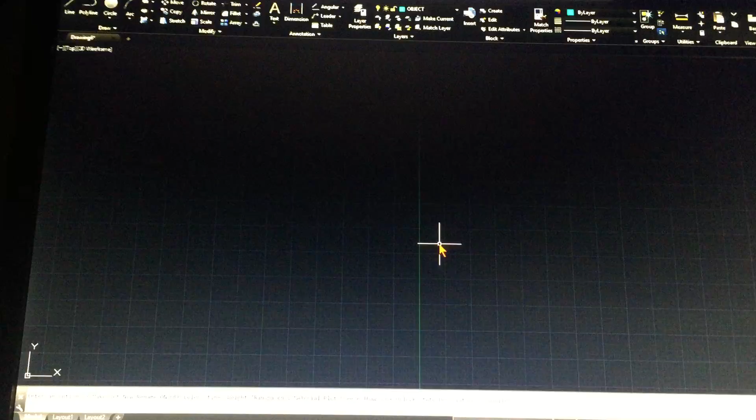So what I'm going to do here is I'm going to change this to my object layer, because my object layer is where I want to draw it, and on my plan, the lines that make up my drawing are in blue. So here we go. Let me show you how this is going to work. Now, I'm going to go ahead and do this, and just kind of go over there.

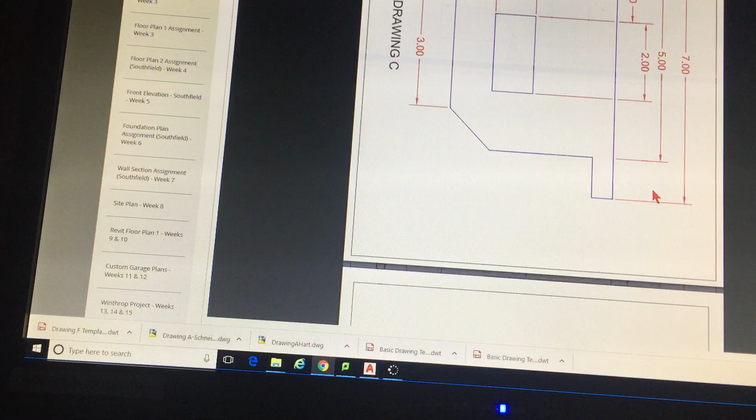Now, you're going to notice that if I take a look at this particular drawing, if I go back out to our AutoCAD assignments and look at them, and if I scroll out here, I'm going to see that drawing F is, as I mentioned, kind of different, and we're going to do this.

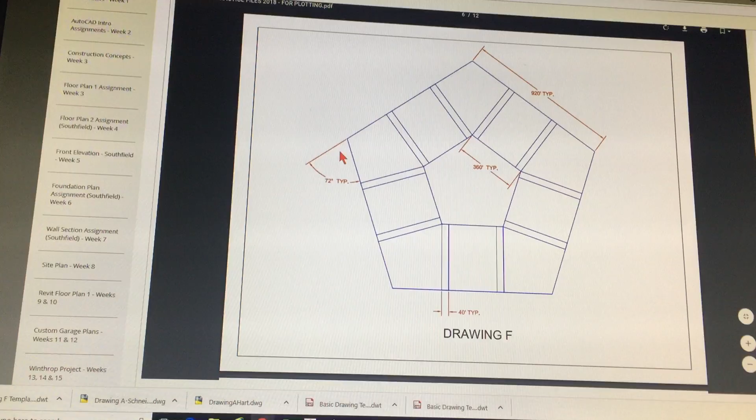So what we got is 920 feet along one of these pentagon sides. So 920 feet, that's pretty huge. That's a real lot of real estate, which is going to give us 360 feet here and the 72 degrees right here. So the question is, how do I make this happen?

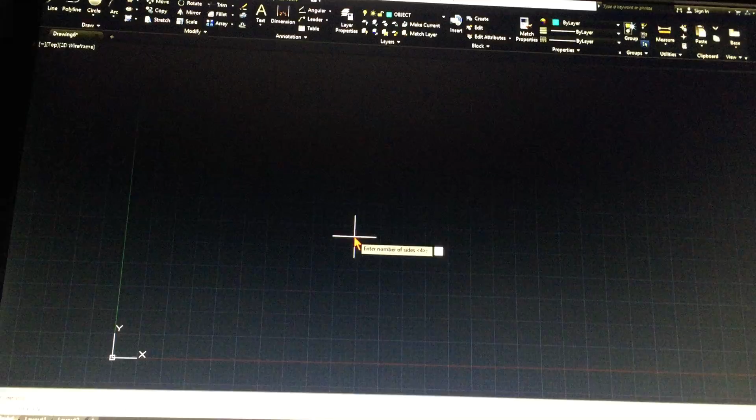Well, there is a polygon command here. Up here under rectangle, you've got a polygon command, and that looks an awful lot like a pentagon to me. So we click here, it then asks us to enter the number of sides. Well, how many sides does a pentagon have? 5. And then it says specify the center of the polygon.

Well, I can't really use that option because I want to use a side, and my side is how long? 920 feet. So I'm going to right click and use edge. This is going to allow me to put in my bottom line here. My bottom line's got to be 920 feet. So I type in 920 feet and then enter. And when I do that, it gives me that kind of look here.

Now let's verify that it's correct. If I click here, and if I hold my cursor, it tells me that it's 920 feet all the way around. We all see that. Okay, now the next thing is I've got another pentagon inside of it, and it's got a dimension of 360 feet.

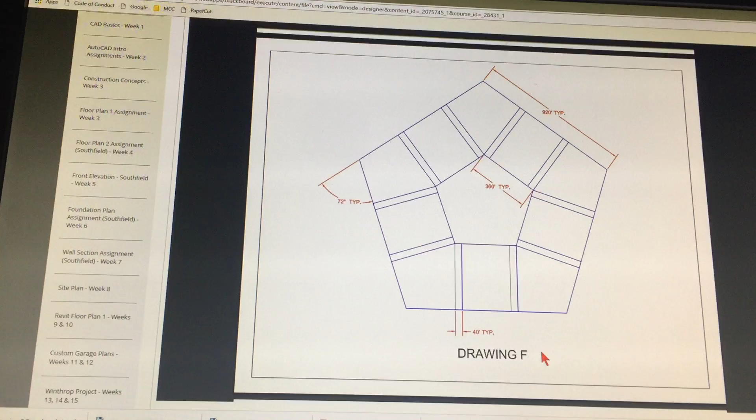So what I want to do is create another pentagon right inside there, and this one's going to be using the geometric center of this. Okay, now the geometric center, you can actually turn that on right here and say, yeah, use my geometric center, or you could just pick it off your right mouse click.

So I'm going to start my polygon command again, and I'm going to use 5 again, like this. Let's see here, what's the best way to do this one? What we're going to do is use our edge mode again, because that's the best way to do it. So we go to edge mode, and we're going to just click a point here and make this one 360 feet. 360 feet, and then enter.

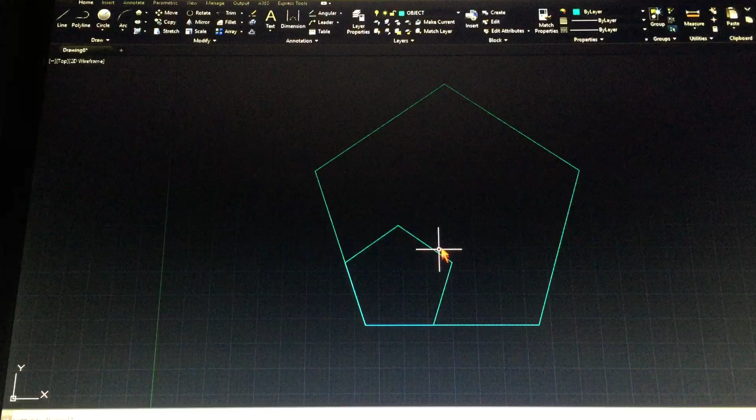Now that we have that, we have two pentagons, and we want to put this one at the center of this one. So we move it. We used copy earlier, we used mirror, now we're going to go to move. Move operates like this. We click on move, and I am going to turn on my geometric center because I'm going to need it for a couple snaps here.

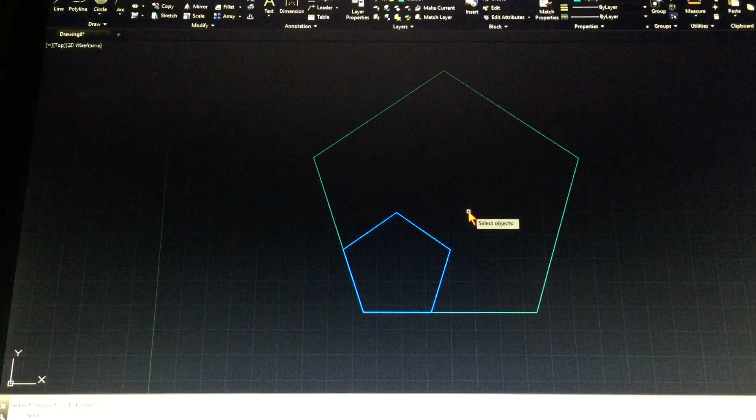So now I'm going to move my pentagon. I click on it, and it says select objects. What do I have to do to get to the next prompt? I right click, I hit enter, I hit my space bar, and it will work. And then I go here, and that shows me my geometric center. It lights up. Then I want to find the geometric center of this other one, and there's that. Boom. I'm good to go.

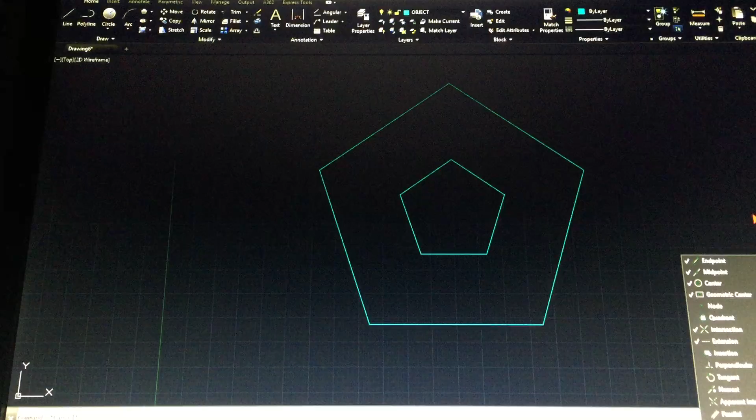So what's happened right there is I drew 2 different pentagons, and then I used the geometric center to place one exactly in the center of the other one, okay? So geometric center is a very useful object snap for shapes such as a pentagon or an octagon, any of those.

Okay, so now that I have this, I've got some lines shown here that are 40 feet apart. So I'm going to start my line command, go right to here, and just drag it right to the edge like that. And then I can use a very cool command, which we haven't seen yet, called offset. Offset is this command right here. And if I start my offset command, it asks me for an offset distance.

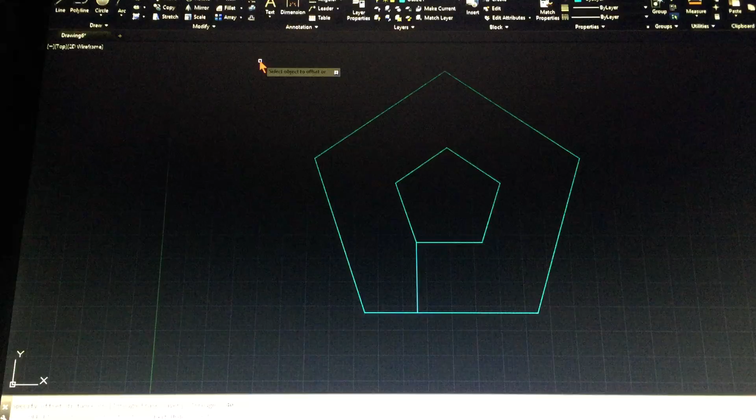Well, if I want to have a copy of that original line 40 feet away from the other one, I type in 40 feet. And then what I can do is go ahead and click here and right there. So now I've got my 40-foot difference there. Now what I can do is I can mirror these over here if I want to by using my mirror command and grabbing these two items and my midpoints here, and I can go ahead and do that. So I've got that done.

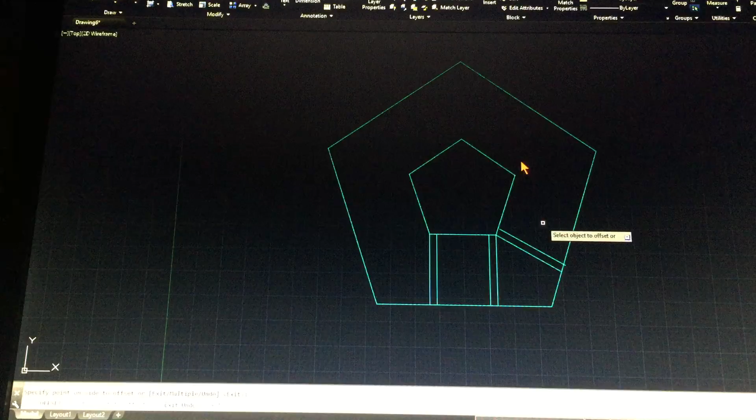Now I just have to do the same thing around to my other items here. So I'm going to go to here, and it's going to go ahead and find that. And so I can just do the same thing with offset, 40 feet, and I'm going to go like this, and offset like that. And then in this particular case, I'm going to need to kind of extend this until it touches there. Let's see here. So I'll go ahead and drag this until it touches there, and drag this until it touches there.

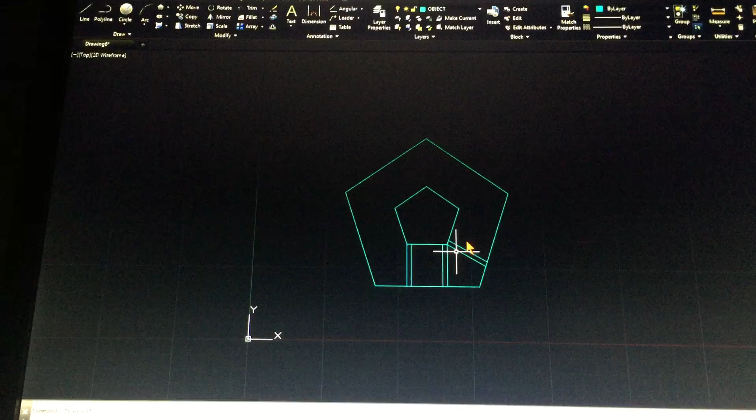Okay, and then I can use my mirror again. So I go to mirror, and I grab this, and I use my mirror right here, and lock it in. That's not liking it too much, is it? Okay, it looks like I missed the angle. That's what it was. Well, let's go on from there. Yeah, I missed the angle. That was on me. So let me go ahead and continue on right here. That's supposed to be a 72-degree angle.

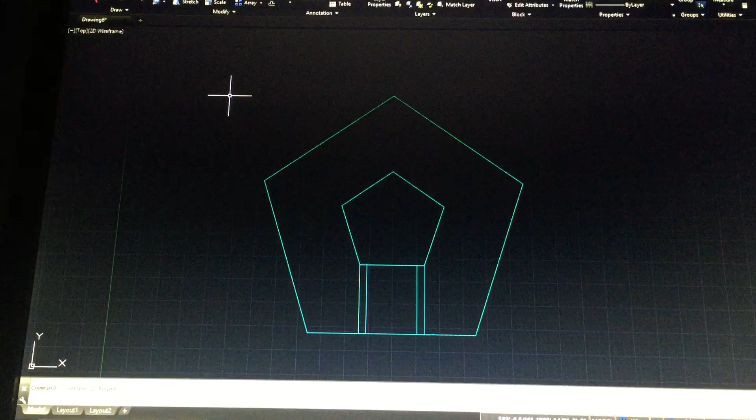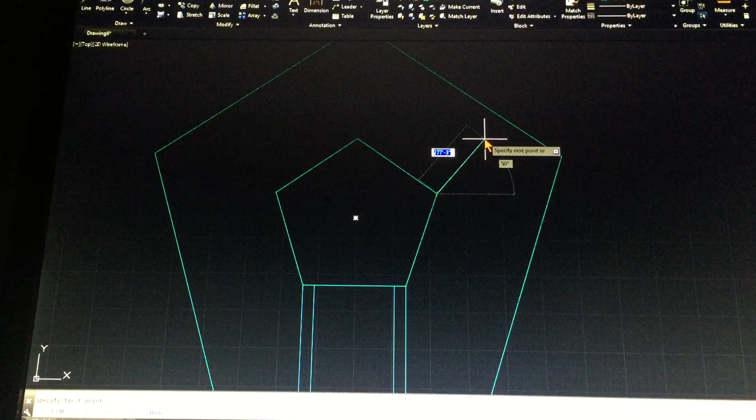Let me start with my line command here. Well, you know what? I think I can use my array command, can't I? I haven't done that yet. Let me try this real quickly here. As far as my angle goes, that's a 72-degree angle. How did I do this before? Because I did it really easily before. Let me try an array. I think an array might work. So I'll go with a polar array. I'm going to grab these objects, and I'm going to grab my geometric center.

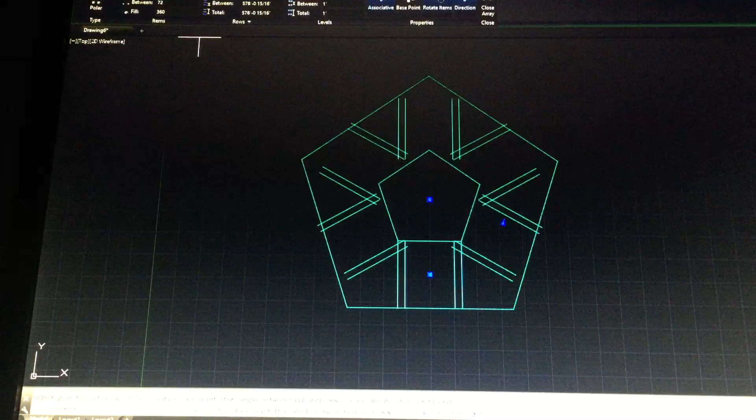Okay, that's right. And then what I want is a total of 5 items. Okay, that's looking pretty close. Let's see, rotate items. Yeah, there we go. I take off the rotate items. Okay, looks good. And that puts it perfectly in place. That's what I did before. That makes life a lot easier. See how those are going perfectly? So that is how we do that. So I did the array. I'll do that one more time for you, because that was quite a bit.

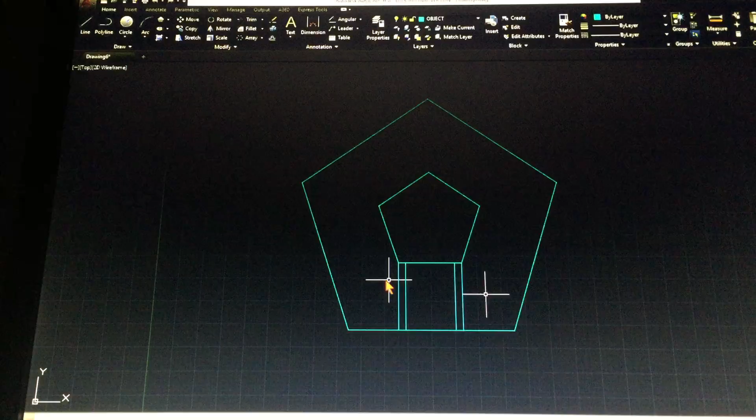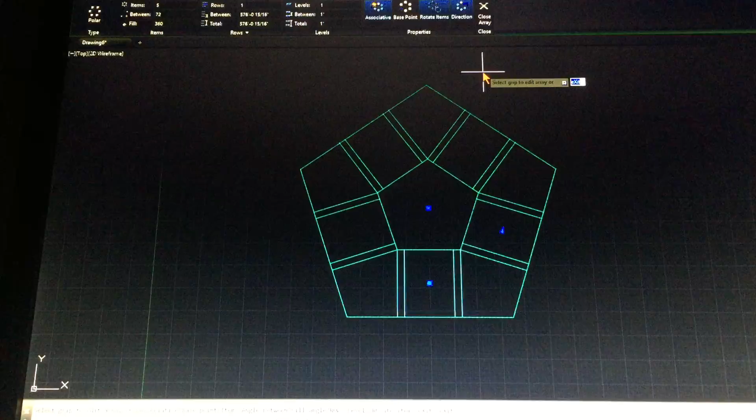Okay, so a polar array makes copies around a center point. So if I go ahead and grab these right here, and I right click, my geometric center is here. So I click there. Now, this doesn't look quite right. First of all, I've got 6 items. I only need 5, because a pentagon has only got 5 sides. And so at this point, it's showing me a real nice preview. I zoom in here, and it all looks good. I close the array. I'm good to go. And so I was able to do my pentagon and the lines in it quite simply.

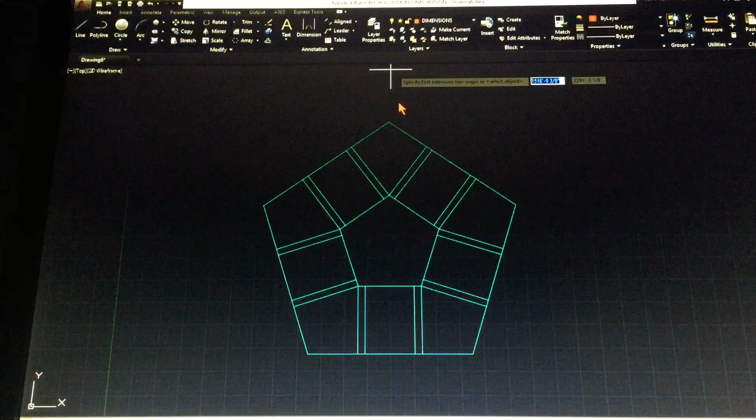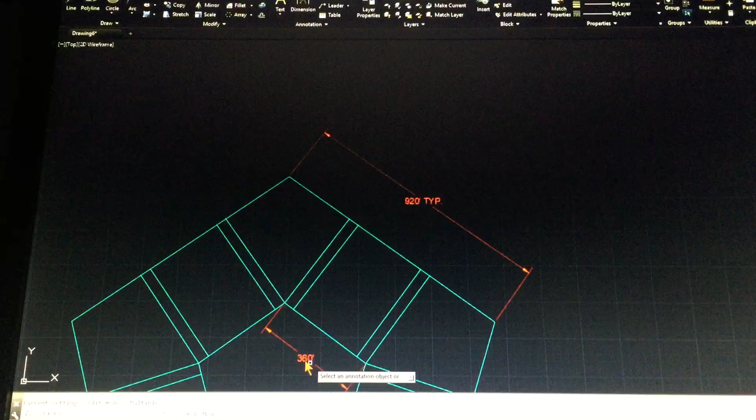Then all that's left is to put in dimensions. So my first dimension, I can use a linear dimension. It allows me to pick a point here and pick a point here. And when I do that, it gives me 920 feet. And the dimensions show up perfectly because I have given you a template. I'm missing a little bit of text here, so I double click here. And what do I type at the end? TYP. Period. So I'm at the end here, and I type in TYP, period, and put the space like that. All right, so I got those, and then I got one more here.

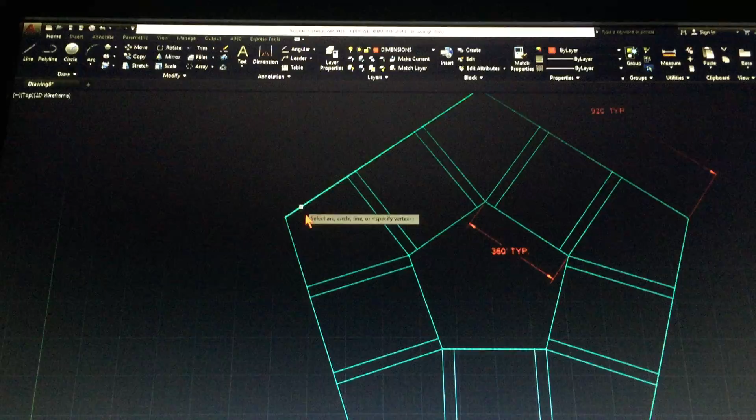Now to do your angle, this is actually kind of cool. You can do what's called an angular dimension. I click on this line here, and this line here. If I do that, it gives me this really nice 72-degree notation. And then I can change this, and do the same thing, TYP, period, and we're all good. So that is how we would complete this particular drawing, okay?

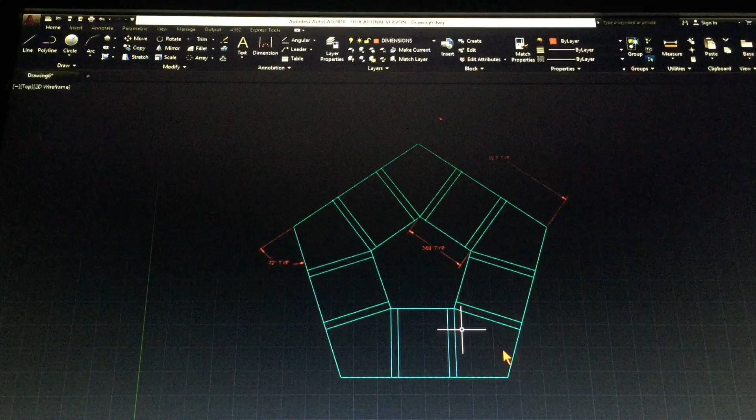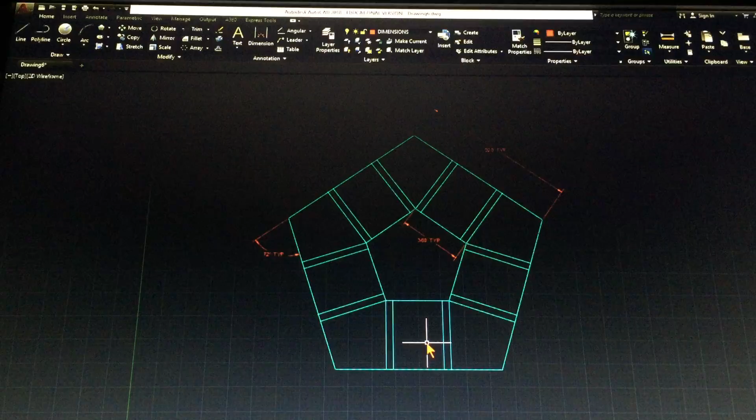So we used the polygon command, and we used the edge mode, which enabled us to give it a 920-foot edge. And then we did it again and made a 360-foot item. Then we used our geometric center to center the two with each other. We drew these lines at the bottom and used an array 5 times around. First we did an offset 40 feet, basically a copy 40 feet away, and then we mirrored it. So we used a bunch of commands building upon themselves. And when that's all done, the last thing we do is put the name of the drawing at the bottom. The name of this drawing is Drawing F.